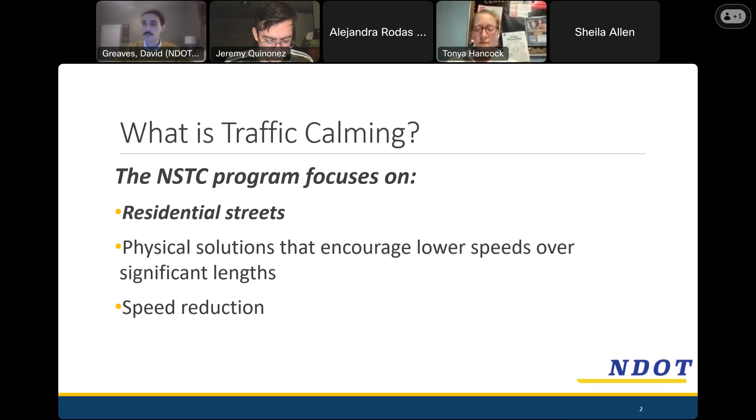To recap, there are the 3 E's of traffic calming: education, enforcement, and engineering. Education is what we're doing now, informing folks who are driving about speeding and why driving unsafely is harmful. Enforcement is totally out of NDOT's hands—we can't write tickets, that's the police department's job, and they're stretched thin, so we can't rely on speed enforcement as the primary way speeding is prevented. Finally, that brings us to engineering, which is really what we're here to discuss. We've designed solutions for each of these streets to help curb the speeding we're experiencing, and I'm here to address that and answer any questions.

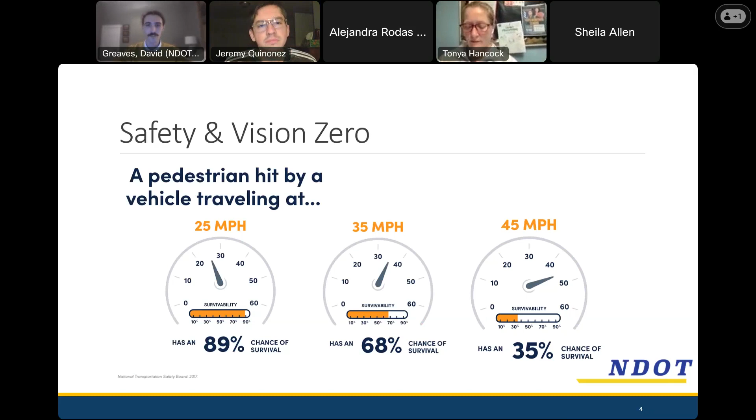The primary goal here is safety and Vision Zero. We're focused on speeds because unfortunately people do get struck and hit by cars, and that often leads to a fatality, especially at higher speeds. This infographic from the National Transportation Safety Board demonstrates how the chance of survival goes way up when cars are in that 25 mile an hour range. That's why we're focused on making sure drivers are going at or close to 25 miles an hour, for the safety of everyone else.

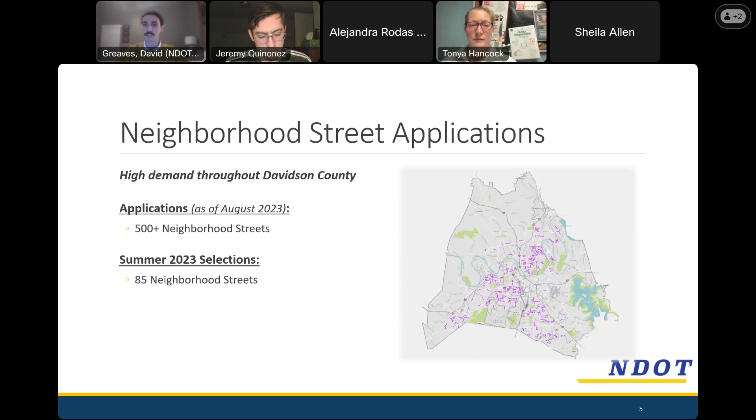That's the first chunk of the meeting. I want to pause and take any questions on the material we've reviewed so far. If we don't have any questions, we can also just move right along—feel free to come off mute or speak up if you've got a question.

Okay, let's talk about how these streets were chosen. Essentially, when NDOT gets applications for a street, they will evaluate it and collect data to basically measure how fast people are driving on this street, how many vehicles per day are coming in.

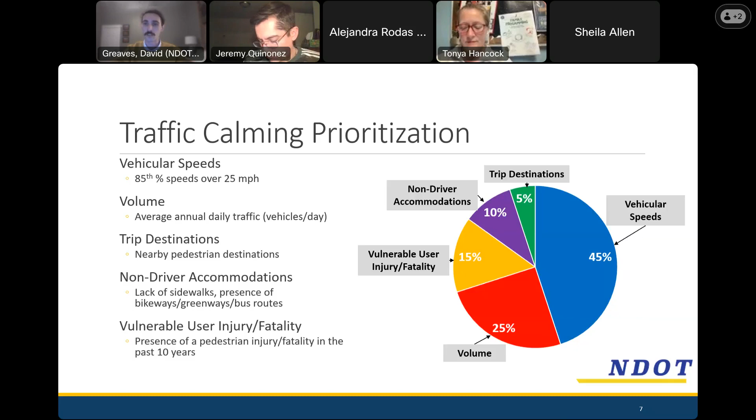As I mentioned before, this is a joint meeting: May Drive from Snow Avenue to Anderson Lane, North Dupont Avenue from Delaware Avenue to Myatt Drive, and Duling Avenue from Gallatin Pike to Kate Street.

There are different volumes. North Dupont is the highest, about 1,600 vehicles per day. That's quite a bit, especially considering there aren't too many residences along Dupont. It's certainly not astronomical.

The cutoff for speed cushions or vertical traffic calming measures is 5,000, so these are all actually a little on the lower end of the volume side. But I think the speeding itself that you're experiencing had a hand in each of these being selected, and the proximity to Madison Park probably also had something to do with it.

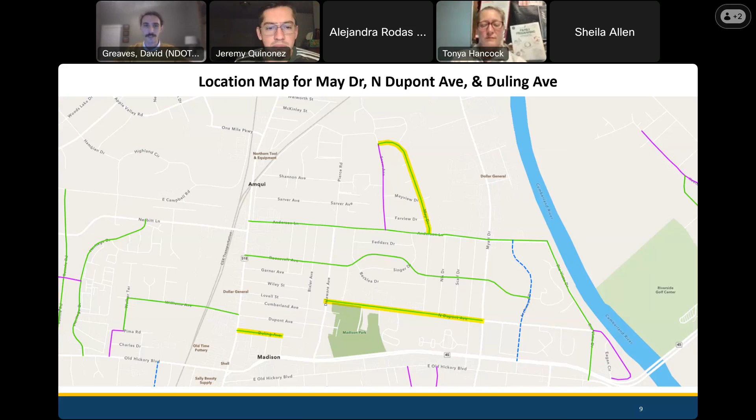We don't have anything besides the traffic count to speculate on, but I have a feeling some of the volume that Duling is experiencing might be folks being directed by Waze, or perhaps they already know you can dodge that big intersection between 31E and Old Hickory Boulevard by cutting through Duling. That's something we see on a lot of these traffic calming streets: if your particular street were a potential route to skip a light or something like that, it can drive the volume up pretty substantially.

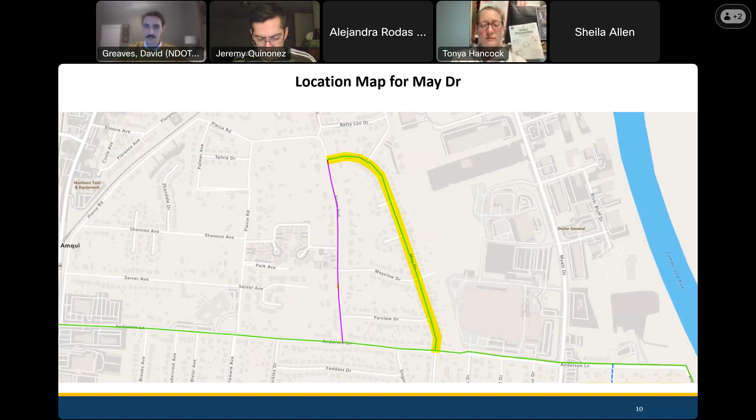We're just going to zoom in a little bit. So May Drive, this is the whole street. It just goes down to Anderson Lane, and that's Snow Avenue up top. North Dupont, this ends at Myatt Drive.

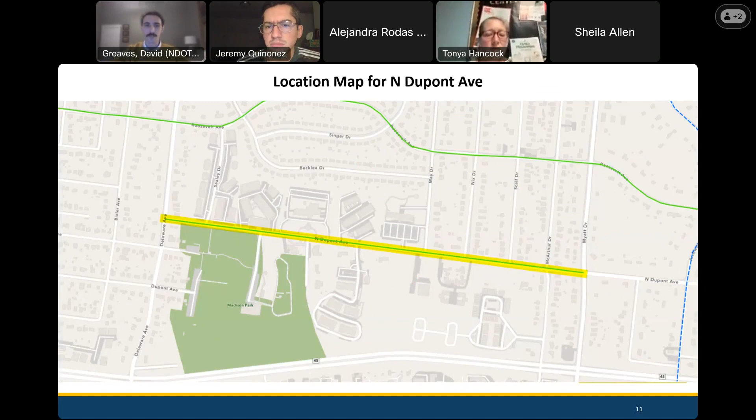There's also North Dupont on the eastern side, but the limits that were applied for were Delaware Avenue to Myatt. Myatt's pretty big, so it makes sense to draw the limit there for a transportation project like this one. And for Duling, these were the limits applied for, ending at Kate Street rather than the full length of Bixler. That was kind of the other clue that indicated to me it might be a cut-through problem more than anything else.

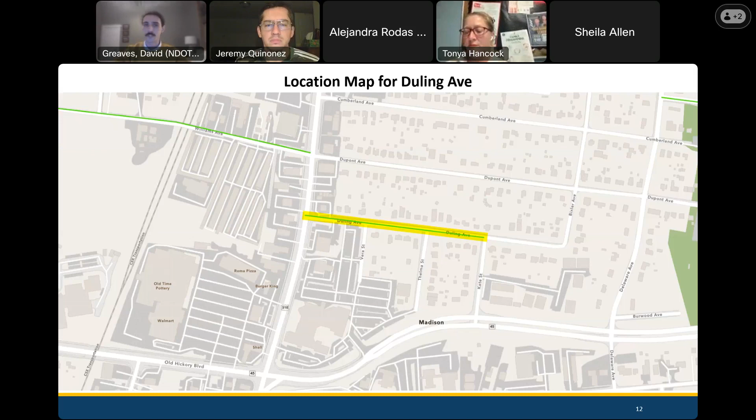But anyway, we're going to be able to put measures on Duling that, even if it doesn't extend all the way to Bixler Avenue, should indicate to drivers that they should be going at a slower speed. Traffic calming treatments generally are intended to treat only the area, but they can also have an effect before or after along the length of a street.

Now I'm going to talk about, in the general sense, what are some of the tools that NDOT has for a given traffic calming project.

Jumping right in, those are speed cushions, among other things, which we've potentially all seen in Nashville. There are now quite a few of them around town. Basically, they're modular rubber devices that aren't so much a speed bump. They're only about 3 inches tall, and the intent is that if you're going at a reasonable speed, in that 20 to 25 mile an hour range, you'll roll over them just fine. But if you were going over them at a higher speed, 30, 35, 40, that experience would be uncomfortable to the driver. So presumably not worth it.

But basically that's how they work. They're essentially a speed bump that's been stretched way out to achieve a higher target speed that we want to experience on our roadways. They're 6 feet wide, and come in a variety of lengths depending on our goals. The reason for that 6 foot width is to make sure emergency response vehicles like fire trucks, which have a wider wheelbase, are able to not slow down as much as a smaller car might have to in order to traverse these at the speed we want fire trucks going. So point being, these are seeking a happy middle ground where they affect most cars that people would be driving and speeding in, but aren't so onerous that emergency vehicles can't get where they're going.

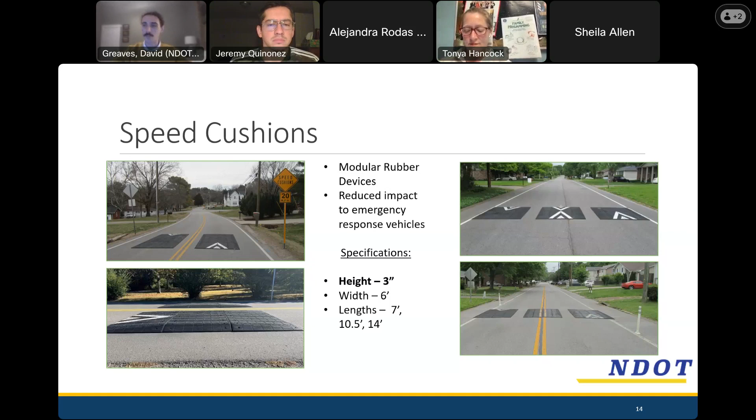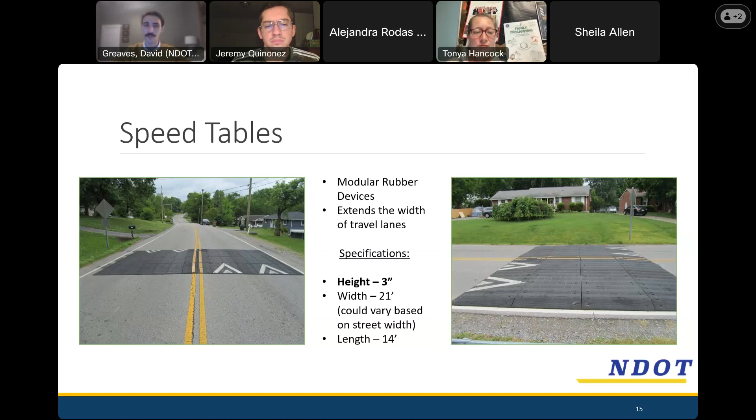Speed tables are really similar. Basically they're just like a ginormous speed cushion. They act the same way, and the intent is the same. It's a vertical measure that impedes a person speeding, whether or not they care about signs or paint or what have you. The main disadvantage of these, as I alluded to, is that they potentially are a hindrance for emergency vehicles. It definitely doesn't take one long to get up and over, but we generally prefer speed cushions where we think those are a viable option, for that reason.

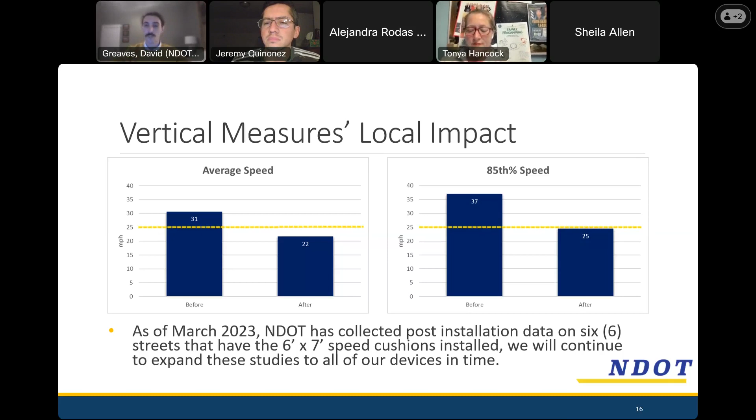The reason we lean on these so heavily as a department is because we know they work. This is a study that NDOT has conducted in Nashville, and it backs up a whole swath of national research, essentially validating the use of speed cushions as tools to lower speeds. We can see that the average speed in that conglomeration of several projects was lowered from 31 to 22. The 85th percentile speed was lowered from 37 to 25. For anyone who doesn't know, the 85th percentile speed is a statistical measure of speeding that acts sort of like a median, but at that 85th percentile mark rather than halfway. Essentially, it's intended to give a more accurate picture of what a normal driver is doing, without being too skewed by outliers who may be going really fast or really slow.

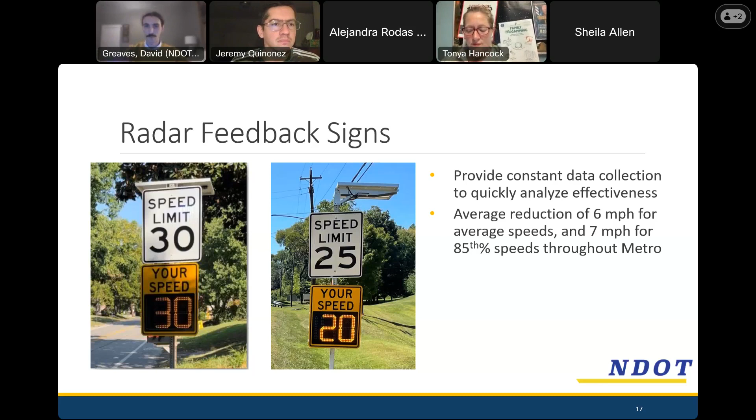In the category of less frequently used items, we have radar feedback signs. I suspect most people have seen one of these before, but essentially it's a solar-powered device that checks a vehicle's speed with radar and then reports that back to them as they drive by. I think the ones Nashville orders will flash red, something like that, if it detects you're going too fast. Basically, these are intended more as a reminder to people that, hey, this is the speed limit, this is what you're going, do with that what you will. The reason we don't lean on these too much is because they don't physically affect cars at all. If I felt like speeding and wanted to ignore the sign, many people would do that. So we'll tend to use these on hills or other areas where speed cushions aren't feasible, but they're not really our go-to for traffic calming design.

Some other options include pavement narrowing. On streets that are excessively wide and really inviting to go fast on, we've found it's sometimes helpful to narrow the visual width of the pavement with white edge lines, to psychologically make the road feel a little smaller and induce a lower speed.

We haven't found that these are a great thing to use just by themselves and expect much to change. They have a marginal effect, but generally when used in conjunction with other things, that's how we prefer to deploy them.

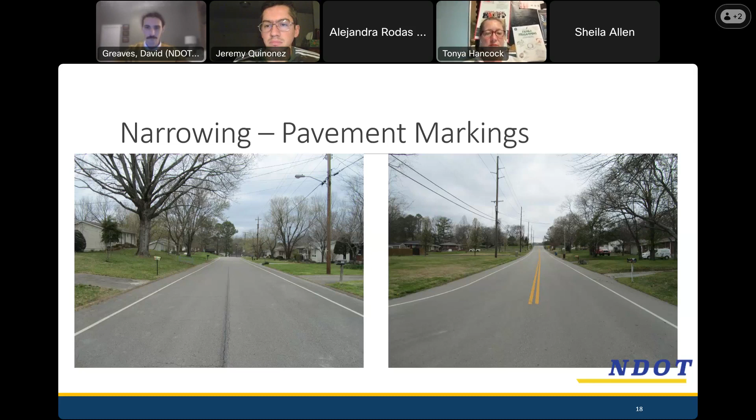Bulb outs and chicanes are more situation-specific treatments for intersections that are really wide and see a lot of fast turning movements. A bulb out narrows an intersection down, removes some pavement, and forces a driver to take that turn at a safer speed. Really wide turning radii can be traversed by vehicles quite quickly. Think about an interstate ramp - that's a wide turn you're able to take fast, but we don't want that kind of driving happening on our neighborhood streets.

So sometimes intersections can benefit from this. Chicanes are where we take a wide road, narrow it up, and send the path of travel in a zigzag fashion. That slows people down by forcing them to maneuver more often. It's also not one of our first choices - we'll sometimes use them in conjunction with speed cushions. The main issue is it's hard to do this without having some on-street parking go away. Often there's still enough parking, but we tend not to let this be the first thing we propose for that reason.

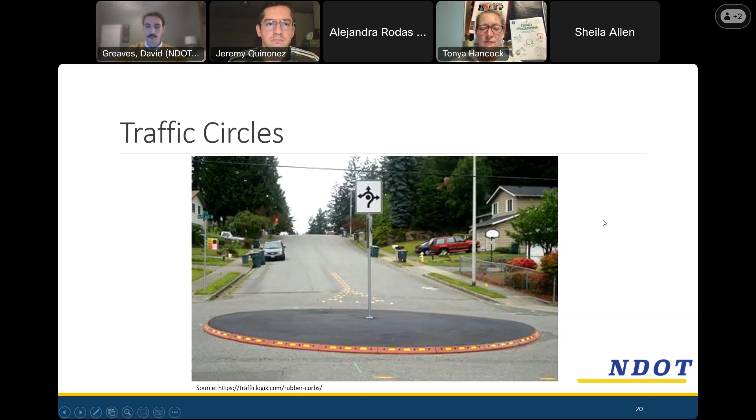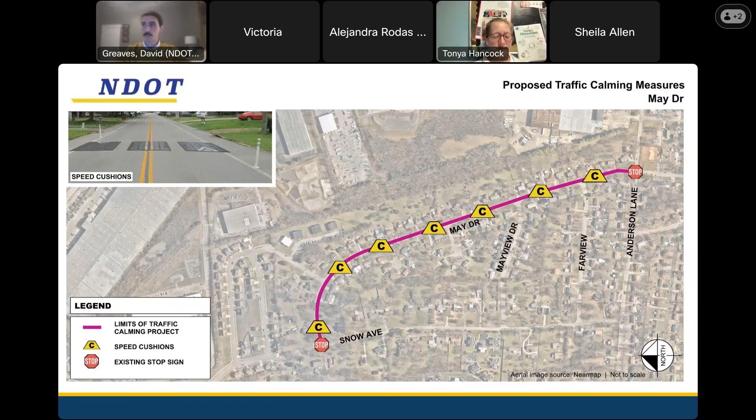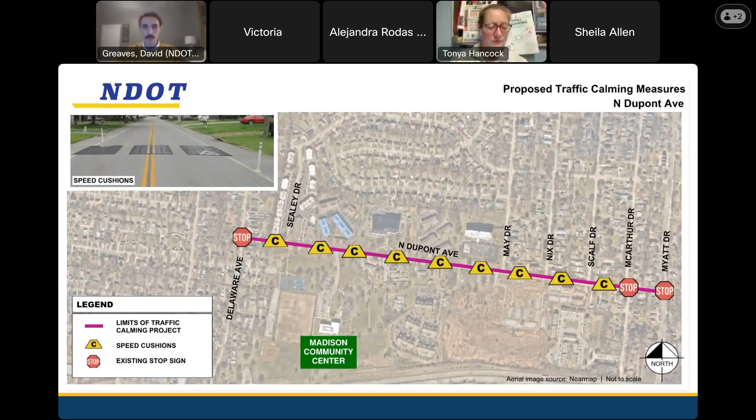Do we have any questions about either Duling or North Dupont Avenue?

Hi, this is Jeremy. What is, I guess, once they start installing these speed cushions—this might be part of the presentation later on—but what is that process like? Do they close off streets? Do they install those in one day typically? How does that look?

Yeah, so what this program focuses on is called quick build infrastructure, so stuff that is really fast. Essentially, these are all bolted to the ground. The only thing you need to do to install them is lay them down, drill the holes in each of those modules, and then put bolts in the street. So I'm sure for some period during the day they would maybe ask you to drive around, but I'm pretty sure they only install one at a time. So out of all the different types of road construction that can happen, this tends to be the least disruptive, and it is pretty quick. I don't think they knock out the whole thing in one day, but they work on it one piece at a time.

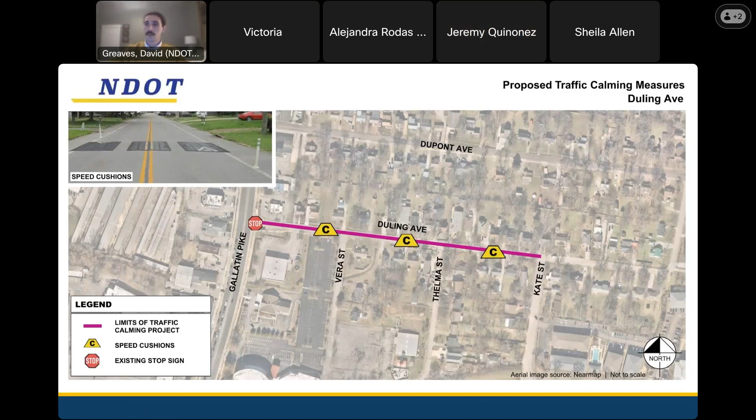Great. So if we don't have more questions on the plans themselves, and we can certainly go back if anyone thinks of anything, I just want to review the flowchart of the program, the timeline, and sort of everything that has happened so far and what will happen going forward.

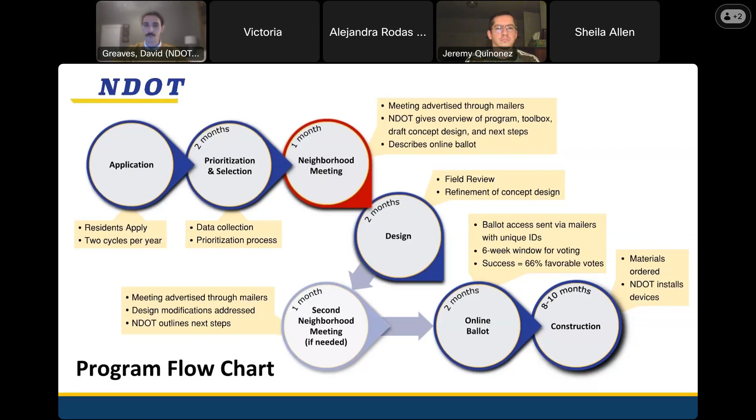So with that, we're going to spend a little bit of time reviewing the details of that balloting process. Basically the same way we send mailers to residents to inform them of meetings, we'll send them ballots to inform them it's time to vote yes or no on your traffic calming project. You can vote online on Nashville's website - there's a form to fill out. If for any reason that doesn't work for you, you can also call NDOT and someone will help you cast whichever vote you please. The information for doing both of those things will be on the mailer.

But if you hear from one of your neighbors that they got a postcard and you didn't get one, or anything else, please feel free to contact NDOT. We definitely don't want anyone who wants to vote to miss the opportunity to do so. It does take a threshold of two-thirds voting yes to have a project pass.

There's a question in the chat asking if there's a minimum respondent number required. There actually is not. So if one person voted yes and zero people voted no, that would be a successful traffic calming project. We usually don't have that happen, mainly because applying to traffic calming takes 4 people to sign on to say yes, I want this project. So most of the time we at a bare minimum get 4, 5, or 6 votes. But yeah, theoretically even one yes vote will be enough because we've publicized that this is going on. If you want to vote no, you don't want traffic calming, then now's your chance to do so.